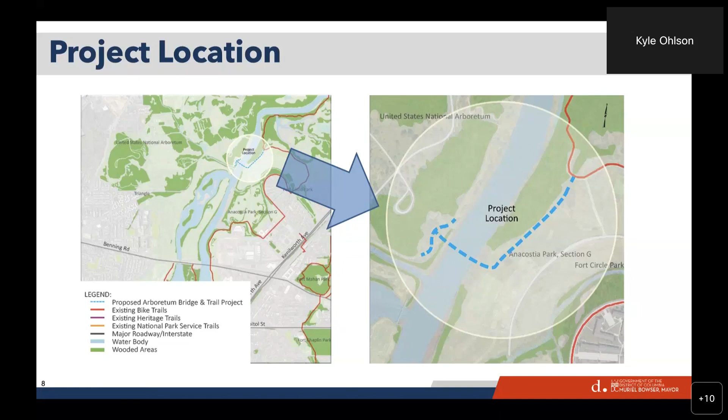We have several photos that we'd like to share to give some site context. And all of these photos have been taken by the project team. I guess just two I'd like to point out. Photo number 2 in the upper right-hand corner there, it gives a sense of the topography of the site. This is looking from the seawall on the east bank up toward Kenilworth Park. And so you can see the existing slope that is there.

And then photo number 3 in the lower left corner, that's looking north along the tree line on top of Kenilworth Park. And the idea, if you look at the diagram here off to the left, you can see the solid green line denotes the proposed trail alignment. And the idea is that the trail would follow the tree line and not disturb the trees, but also stay clear of the existing sports fields.

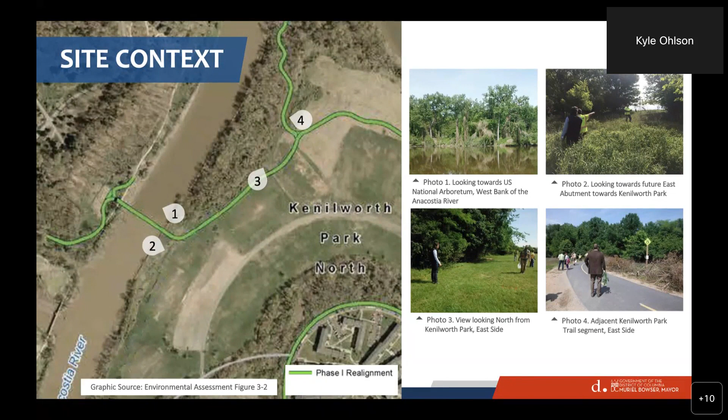So I think on this slide, I'd like to highlight photo number 5. And this is looking on the west bank of the Anacostia River, looking east. So this is Park Service property. And one of the things that the Park Service emphasized to us at first was we need to preserve as much of the landscape as possible.

So even though photo number 5 appears to show some trees that are in decline or have died, those are still really valuable habitat. And so the Park Service made it very clear to us that those trees need to remain. We should not consider those as something that can be removed. So we've been mindful of that, and we've worked very closely with the Park Service to make sure that what we're delivering is environmentally sensitive.

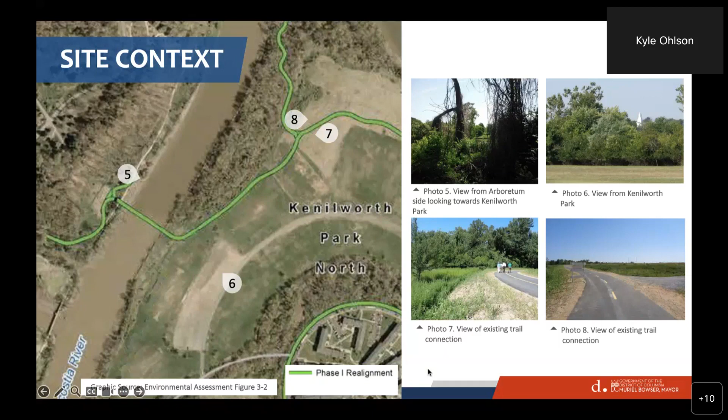We have a couple photos here to show the west bank of the Anacostia River. Now, this area is still National Park Service property. So the entire trail is proposed on National Park Service property. There's a small strip of land between the west river bank and the U.S. Arboretum. So this is all Park Service property.

There's an existing dirt trail on the west side, and we don't intend to improve all of that. However, the area that is overlapped with the solid green line, that's part of this proposed trail. That will be improved and will become a paved trail.

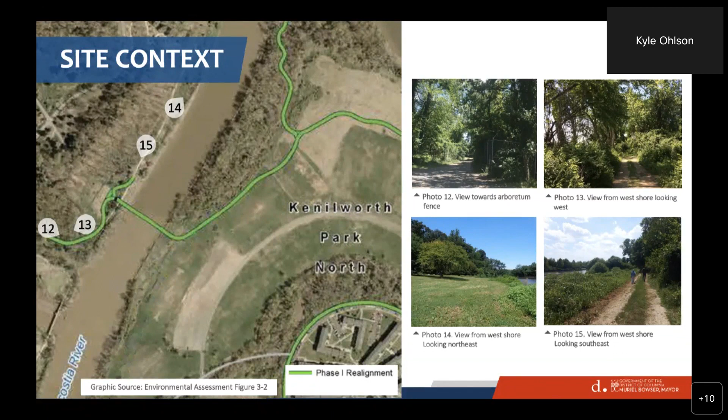Here's a rendering showing what the trail could look like. This is on the west bank, and it's looking north. So the Arboretum is off to the left side of the screen, and the demarcation line, the property line between the National Park Service and the Arboretum, is essentially where the taller trees start.

You can see on the right side of the rendering, if you could go back a slide, thank you. So on the right side, there's the bridge in the distance. And so that's just the start of the crossing over the river.

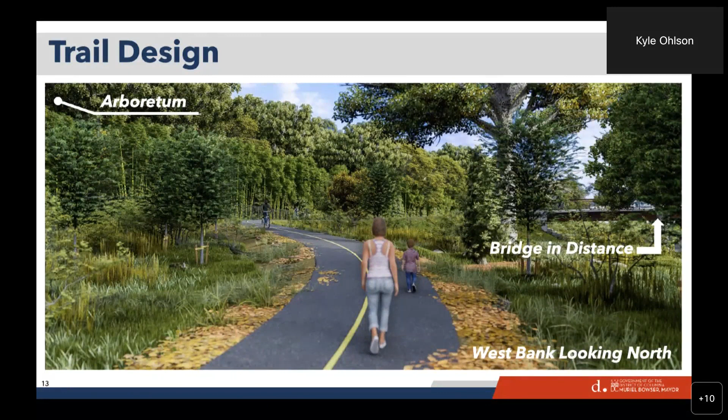This is a pretty typical trail cross section. It will be two 5-foot wide paved travel lanes. They're multi-use lanes, so it will be ADA accessible and compatible, open for anybody with bicycles, skateboards, wheelchairs, and people on foot. We also have two shoulders, earthen shoulders off to the side.

And the unique thing here is because Kenilworth Park North is a former landfill site, we've been careful not to disturb those potentially sensitive soils. So this shows the trail being up on a few feet of embankment, 1 to 2 feet approximately, to make sure that we can construct the trail on top of the existing landfill soil without having to do much excavation that would result in potential unnecessary disturbance of that soil.

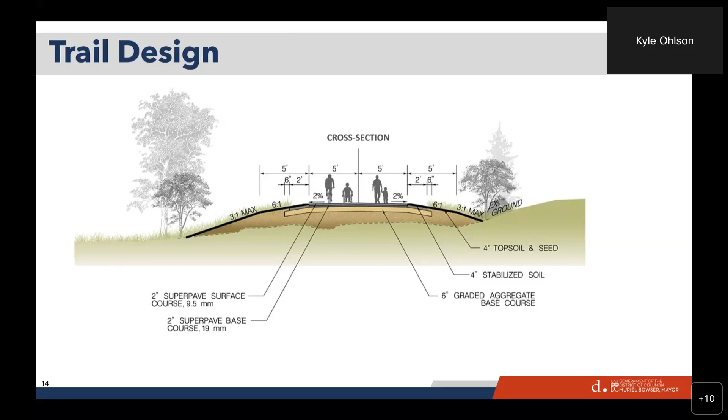There have been plenty of questions about trail safety. And so as part of this design, we will be including wayfinding signs at the trail junctions. And that's consistent with what exists on other parts of the Anacostia River Trail.

We also will include post-mounted mile markers at the half-mile intervals and pavement markings with the mile markers at every 1/10 of a mile. Those markers will also include a trail name abbreviation, so that in the event there's an emergency and someone needs to make an emergency call, you can read off the abbreviation and also the mileage, and that will help the emergency responders get to wherever help is needed.

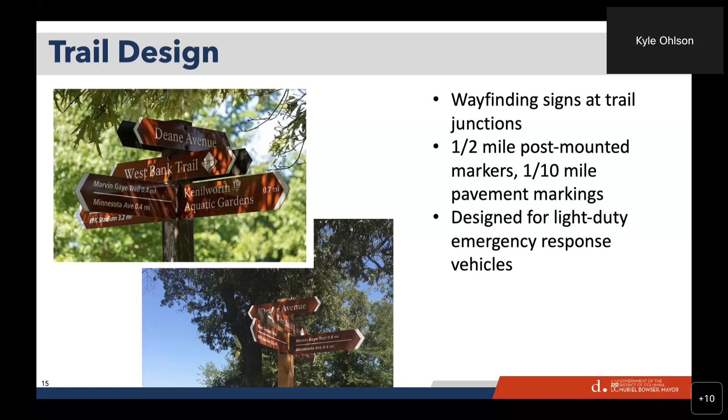The trail is designed for light-duty emergency response vehicles, and again, that's consistent with other trails in the district. So this has been designed in accordance with FEMS requests, and it's our full intention to make this compatible with their needs. So with that, I'd like to turn the presentation over to Joe Spadea with Pennoni, and he'll talk about some bridge design.

Okay, great. Thank you, Kyle. My name's Joe Spadea. I'm the design consultant manager with Pennoni. We have been working together with DDOT and National Park Service and others throughout this process. So what I'm going to talk about here is, as with any design, there are constraints to the design that need to be looked at and considered. A couple of the big ones we have listed here.

Obviously, the bridge and trail are within national park land. They are touching down on Kenilworth Park landfill. So one of the things that we needed to be mindful of when developing our design was that our foundations did not call for excavating in the landfill. So our design, instead of excavating in the landfill, is looking at driving piles and grading up on top of, as Kyle mentioned earlier, the existing landfill.

The other parameter that we have, and I'll show in the next slide, on either side of the bridge, on the Arboretum side and on the landfill side, there are two historic seawalls. And so when we looked at the design configuration and where to put the bridge supports and the abutments, we needed to consider the potential impact upon the seawall.

So one of the key things, if we look at the original span configuration that came from the EA, and when we overlaid the rowing lanes and we took a look at the channel, one of the immediate needs was to address that Pier 2. And by the way, just quickly before I go further, a little bit of bridge anatomy for folks that may be new to understanding the components of a bridge.

So at the very bottom of the bridge, we have our foundation, and then building up out of the water, the columnar shapes that you see there, and one of those is highlighted in red. Those are called bridge piers. And then on the left and right-hand side, where the bridge touches down on ground, those are what we refer to as bridge abutments. And these are numbered sequentially from the left side to the right side. So you have abutment 1, then Pier 1, then Pier 2, which is highlighted in red, Pier 3, and then abutment 2.

So one of the challenges we immediately saw, and if you call your attention to the blue text at the bottom, the 90-foot, 45, and 90-foot rowing lanes, we wanted to make sure that we weren't going to be impeding on those. So this was the original concept, and then what we did look at was shifting the bridge. So next slide, please. So what we did, we had discussions with the Coast Guard about alleviating the clearance requirements, the buffer that was part of previous designs. And so in this configuration, we have 2 clear rowing lanes going through 120-foot spans. And the center Pier 2 is located within the 45-foot buffer.

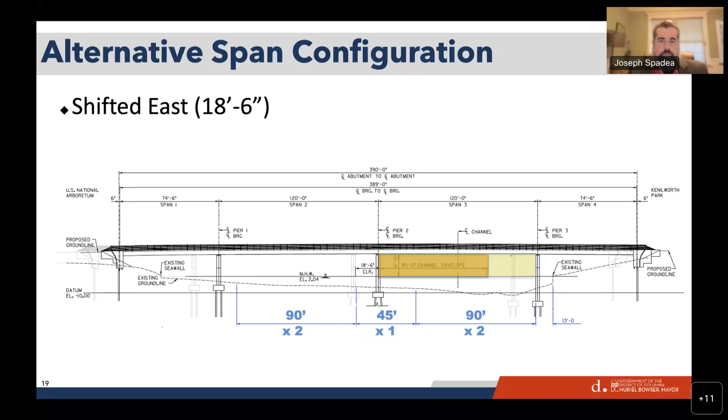We then thought further about this in trying to address some of the feedback from the water users, and we tried to look at, could we take Pier 3, which is on the right side, and if we go to our next slide, could we take that Pier 3 and slide it even further and put it in line with the seawall? We did get feedback, unfortunately, from the Historic Preservation Office, because the seawall was considered historic. We were asked to not do that. We were asked to make sure we minimize the impact, if any, to the seawall. And so from where we currently see, and by the way, the span lengths we have here are 132 foot.

And if we go to the next slide, ultimately what we ended up doing was pulling that pier back from the seawall, and that's highlighted in red, just so that we would minimize disruption to the seawall. However, we tried to maximize, again, the channel clearance and the clearance between the piers. So for the sake of scale, between piers 1 and 2, which is called span 2, and between piers 2 and 3, which we refer to as span 3, there's 123 feet between those. And for comparison, that's the equivalent of the length of an A320 Airbus plane. So it is a pretty sizable span.

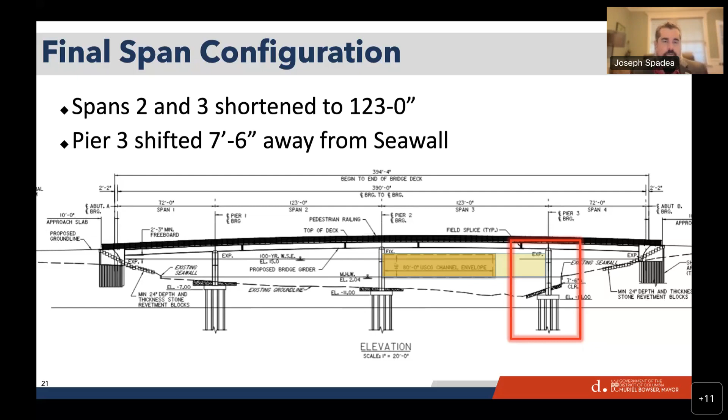And again, going from the original span length, which was 120, we've increased that. We've shifted things around to make sure that the center pier would not impede the 4 rowing lanes. Again, this is a rendering of the bridge. This is looking from Kenilworth Park towards the US Arboretum. And a couple things I'll call out. I'll go back to the bridge anatomy 101. The objects rising up from the river that are concrete and stone, those are what we refer to as the bridge piers. And then the orange colored element there is what we refer to as the girder. There's three main steel girders that support the deck, which is the portion where folks would bike, walk, etc.

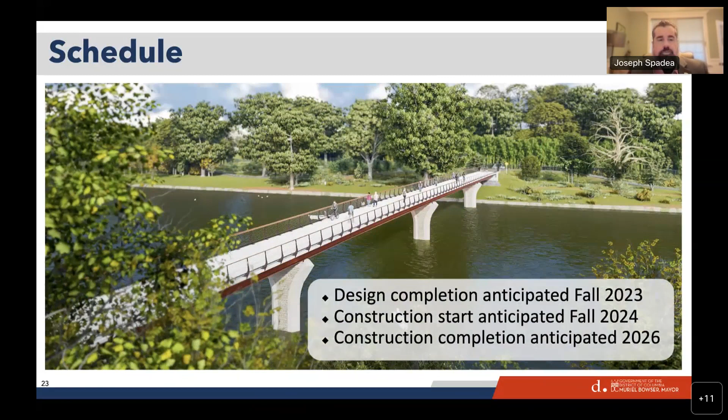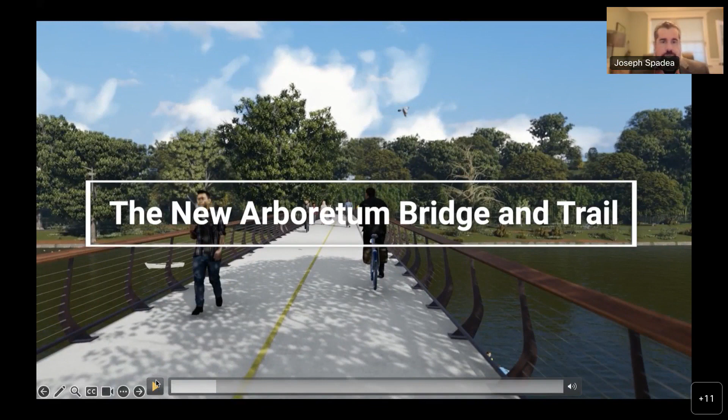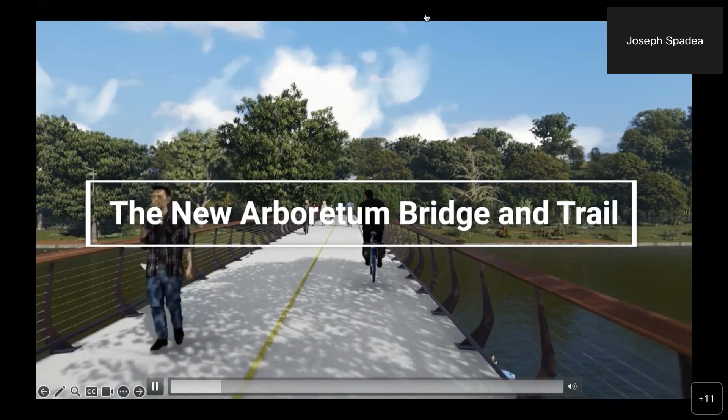So the design team has been working on this with DDOT and National Park Service, as mentioned. We anticipate completing the design this fall. We anticipate construction beginning in the fall of the following year of 2024. And construction completion, we anticipate around 2026. This is an animation of an actual 3D digital twin of the bridge. You can proceed with the video. I'll just talk over it. That's fine. So what you're looking at here is going towards the Arboretum.

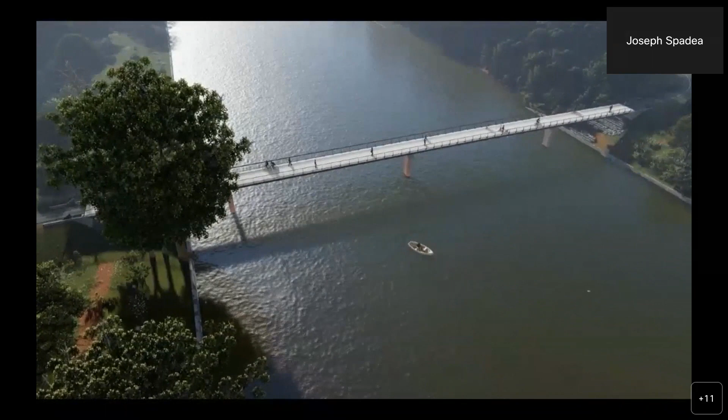This is a shot looking north. On the left is the Arboretum. On the right is the trail connection through Kenilworth Park. Again, looking towards the Arboretum. And then this is a view looking north, going up the Anacostia River. There's the navigational channel, identified by those red and green lights. The north side here being the Arboretum. Top of screen is the Arboretum.

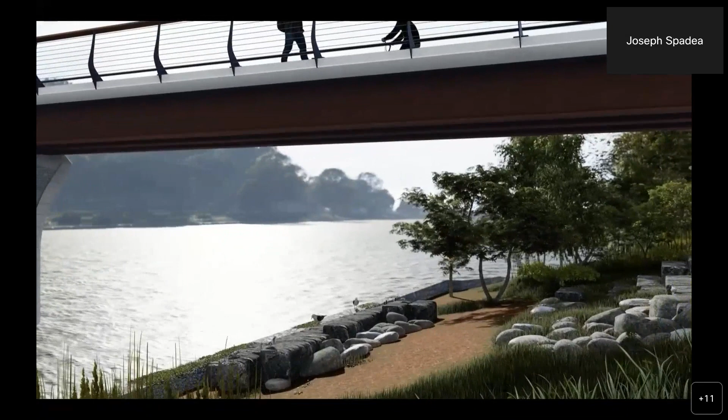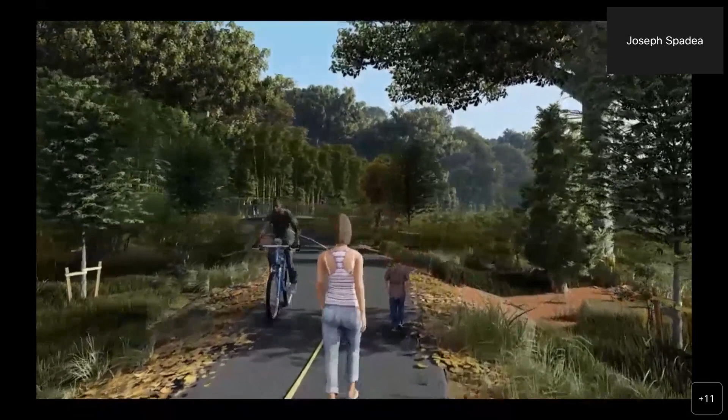And then this is a view looking north from Kenilworth Park towards where most folks currently will launch a kayak into the river. This is a view walking on the Arboretum side, heading north. The bridge is off to the right in the background there. And then this is a final shot just showing what the bridge looks like again from the river.

All right, back to you, Stacy. Okay, thanks, Joe. All right, everybody.

So on the screen now, we have our project contact information. As always through the process, we want to make sure that you know who to send comments and questions to. At the end of this presentation, we will have an open comment and question period that will extend for 30 days through August 27th. So if you have anything that you want to send, please send it to me. I am Stacy, and my email address is stacy@tbaconnects.com. I'll also drop that in the chat before the end of the meeting, but it's S-T-A-C-E-E at TB as in boy, A as in apple,

CONNECTS.com. The project manager on the DDOT side is Kyle Ohlson. His email address is kyle.olson@dc.gov. Spelling of his name is K-Y-L-E dot O-H-L-S-O-N. And then also Joe Spadea, who you just heard from, is the consultant design manager, and his email address is jspadea@pennoni.com. That's J-S-P-A-D-E-A at P-E-N-N-O-N-I dot com. Again, all questions should be sent to me just so we can track that and make sure that you get answered, and also that they're included in the frequently asked questions.

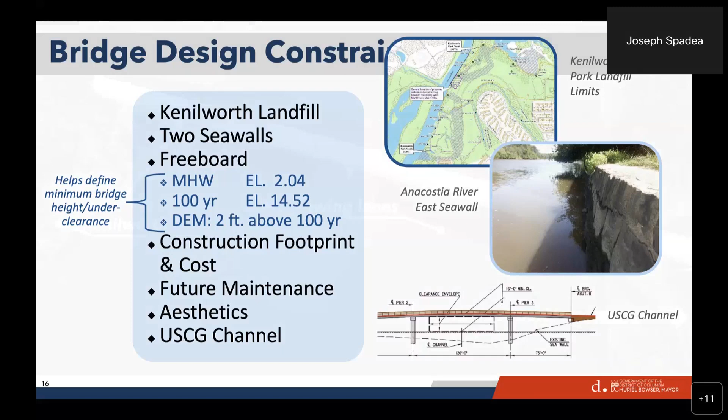So if you were referring to this slide, this one is looking north. And again, this came from a separate document. This was from one of the planning documents. But yeah, this is looking north. Kyle, the subsequent slides also are looking north, where we show the span arrangement. Yeah, so here, this is also looking north. Yes, thank you, Joe. Okay. Thank you to you both for the answer.

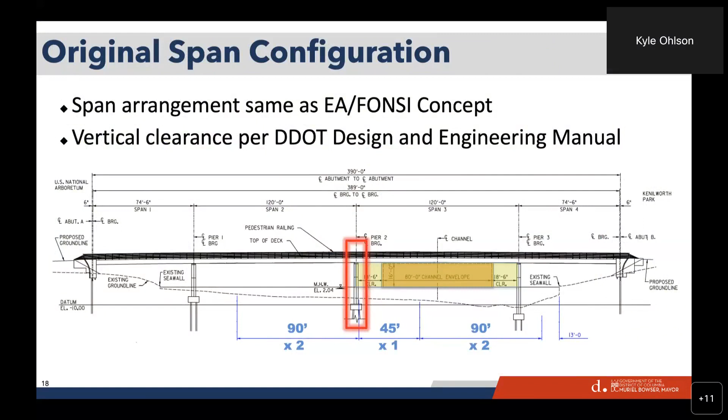I'm going to jump to Q&A where we have one question that came in around this time from Miriam. Why are the baseball fields being preserved? Will this park not be improved over its current condition? This is Kyle. I can start just by saying, as part of this trail, we don't want to impede the current use of the park, right? And that's something that came from the Park Service. They've been very clear to us that we want to keep those sports fields. As far as future uses go, is there somebody from the Park Service that might be able to give a little more detail?

Hey Kyle, this is Mike. I'm currently on from the Park Service. Hi everybody, this is Mike Caniso. I'm the Deputy Superintendent over at National Capital Parks East. Just wanted to clarify, the current permitted areas are part of the larger transfer that will be occurring here in the near future. However, it's still under Park Service jurisdiction at this point. And we are doing our best to make sure that the bridge in its current location is consistent with what was within the EA, as well as some of the plans that DDOT has developed over the last 10 to 15 years. So that is my answer for that, Kyle. Okay, thank you for that, Mike.